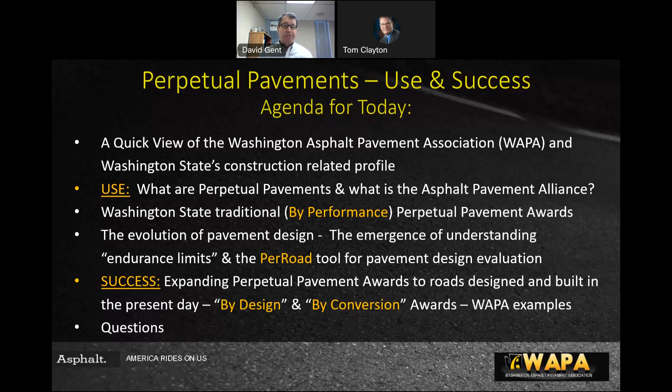Okay, this is being a little clunky.

Major attributions for the content of this presentation go to Dr. Dave Timm from the National Center for Asphalt Technology, which I'll refer to as NCAT, at Auburn University, where he's also a civil engineering professor. And Amy Miller, our national director for the Asphalt Pavement Alliance, and vice president of industry alliances for the National Asphalt Pavement Association, which I'll refer to as NAPA.

The Washington Asphalt Pavement Association is a single point representative. We were founded in 1954, before NAPA was even organized. All of WAPA's producing members are also NAPA members, so we are really invested in fully supporting state, regional, and national advocacy.

Washington Asphalt Pavement Association represents 15 companies and approximately 66 asphalt plants that manufacture 98% of the asphalt mix produced in the state. Those same companies are also contractors, constructing 98% of the public works pavements in the state for states, ports, etc. So WAPA is the single point representative for the asphalt pavement industry.

We work extensively with our Department of Transportation and all other stakeholders on asphalt issues, especially with local agencies and public works. We also work closely with the American Public Works Association chapter in our state to maintain local agency specifications that may differ from state DOT specs. Much like CAPA, we lead annual training programs and serve as the industry liaison for legislation and agency regulation.

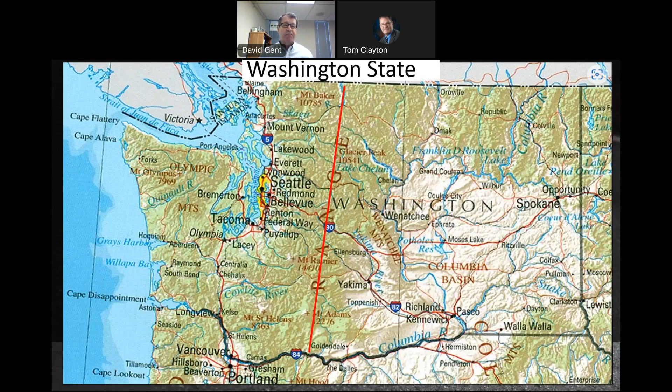Our state population is 7.71 million. Western Washington is more urban, with over 6 million people, or 78-plus percent of the population. There's a lot of rural character just outside the population centers, dominated by industry, seaports, and tech that underpin and drive the economy—Boeing, PACCAR, the ports of Seattle and Tacoma, Microsoft, Amazon, Starbucks, and older line industries like Weyerhaeuser are still centered in Western Washington.

We've got more moderate seasonal changes and much more rain on the west side, roughly an 8-month paving season from mid-March to mid-November, but we lose a lot of days to rain during that time. The dominant asphalt binder on the west side of the state is PG58H, an MSCR designation, which is basically PG 64 minus 22.

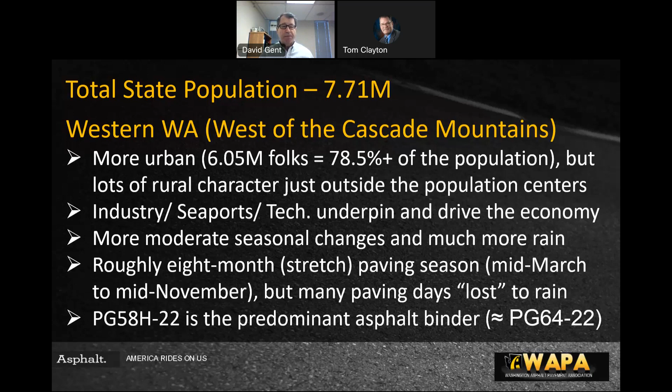On the eastern side of the state, it's more rural with an agricultural base—apples, potatoes, wine, and wheat. It's very arid with hotter, drier summers, and in the last 5 or 6 years that's meant wildfires choking the whole state sometimes for weeks on end. They have much colder winters, much more snow, and about a 7-month paving season.

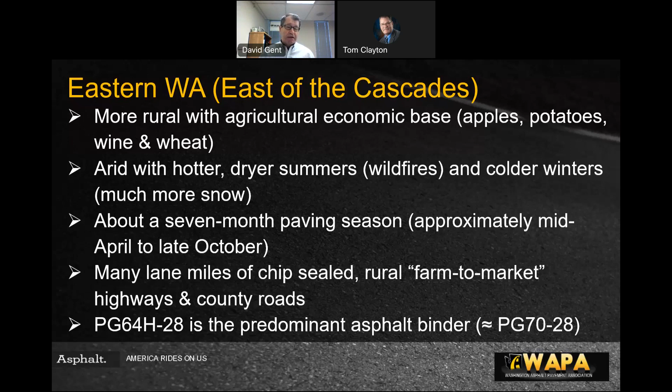Many miles of chip sealed pavement because they've got a lot of rural farm to market highways and county roads. They use PG 64H minus 28, which is roughly equivalent to PG 70 minus 28. So that kind of gets you this road miles.

This is a good reason for us to tell the story about perpetual pavement, to show that with proper preservation, they will serve the state well through many decades and generations. We want to spread that message and highlight it for legislative bodies that don't like to spend limited resources on boring stuff like pavement maintenance.

So what is the Asphalt Pavement Alliance? That's what we've got to start with, before we talk about perpetual pavement awards.

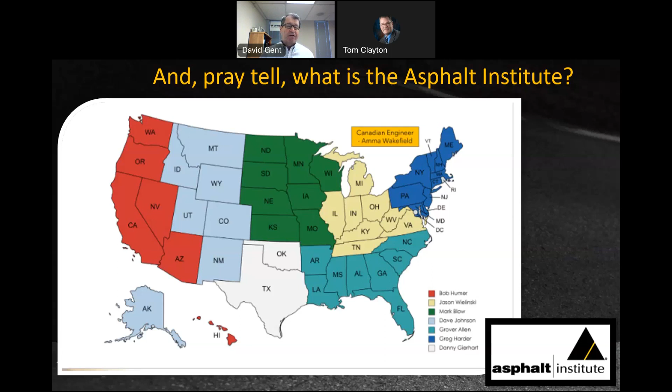She's something else, she's got a lot of ground to cover. They supplement the SAPAs and NAPA where needed, especially in critical states that don't even have a SAPA. There are several states, you can see in the West, several states that don't have state asphalt pavement associations, and a few in the Northeast too, and Alaska.

So perpetual pavements. Through the Asphalt Pavement Alliance, the industry came together in 2000 to identify long-serving pavements to highlight the long-term value of asphalt pavements that were designed and built appropriately. Remember, back in 2001, Superpave mix designs were very new and not widely accepted yet, and the predominant pavement design tool was AASHTO 93, done with nomographs, etc. The asphalt binders were non-polymer binders, usually best fitted to states' individual needs and best informed by the Asphalt Institute's old penetration or aged residue grading systems.

We've traveled a long way in the past 20 years, but prior to that, there were a lot of great pavements built that deserve recognition for their superior performance - that's the APA's mandate. Secondarily, but it actually became a very key role, they could help industry examine what the best of these long-term pavements had in common. Why did they last so long?

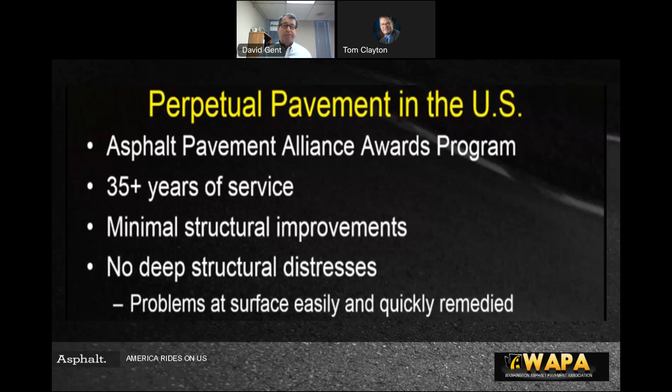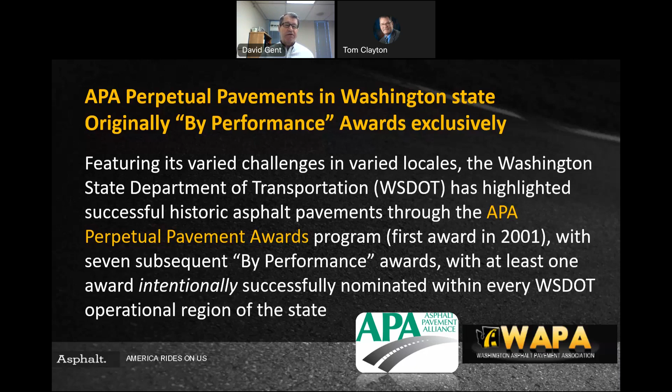The APA Perpetual Pavements in Washington State were all originally by-performance awards exclusively, which is true for every place in the country up until last year, featuring our varied challenges in varied locales. The Washington State Department of Transportation has highlighted successful historic asphalt pavements through the APA Perpetual Pavement Program, with 7 subsequent by-performance awards, with at least one award intentionally, successfully nominated within every operational region in the state.

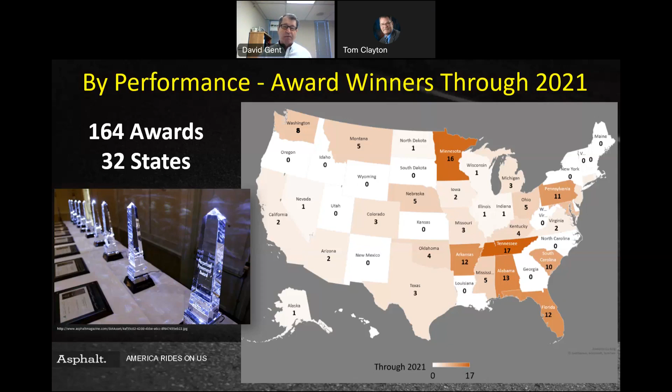So what is a by-performance perpetual pavement? Minimum of 35 years of service life, so it's proven by performance. Minimal structural improvements over the pavement service life, not more than 4 additional inches of structure in the last 35 years. Resurfacing infrequently, not less than 13 years before overlays, and no deep structural distress. Only surface remedies needed to maintain the full functionality of the pavement.

These criteria were used by the APA to determine award winners for legacy pavements that have proven that the structural design was designed and built to meet its intended function. They need to have been in service for 35 years.

So Washington's, I'll just highlight our 2021 by-performance award-winning pavement, mostly because it doesn't have to be a high-profile pavement to be a perpetual pavement. This is a 4-mile plus section of State Route 7. It has an average daily traffic of only 1,971 with 9% trucks.

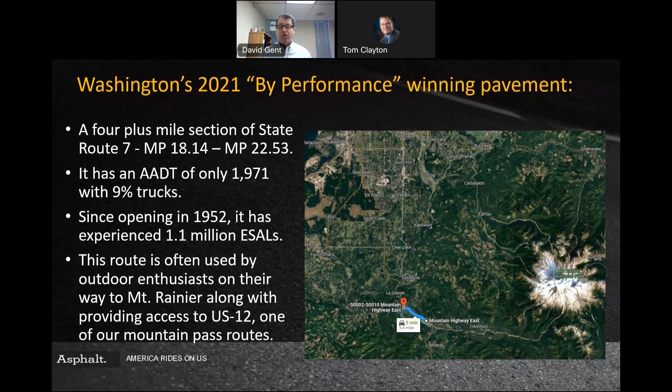This example is the definition of a perpetual pavement by performance. It's proven its design over 70 years of service. Just real quick, the pavement structure consists of 3 inches of asphalt concrete, Class B - an old spec for 5/8 dense graded mix - with AR 4000W asphalt binder originally, over 2 to 5 inches of crushed surfacing, over selected untreated granular material.

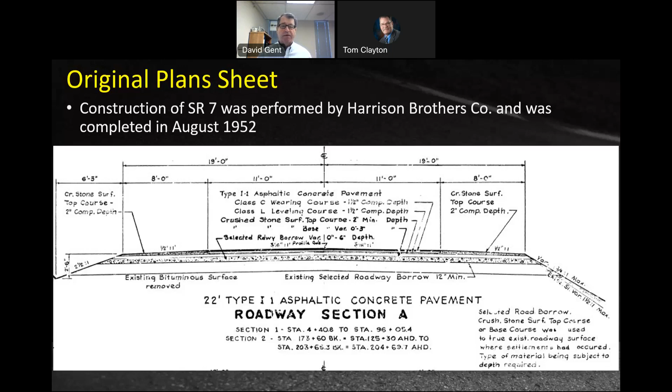So they basically reshaped the road from its original design over some gravel borrow and built this 3-inch pavement over the top of it. This is just a more close-up picture of the design of the time. In this region of our state, we're very fortunate that we have hard, clean gravels, so the salvage material used on the bottom from the select borrow through the crushed rock layers incorporated into the pavement are all superior quality rock with respect to highway construction.

On this particular highway, traffic loads have remained modest, and with recent 20 years of restrictions on timber harvesting, it may even have declined a little bit on equivalent axle loads because there are fewer logging trucks in the area than there had been 20-25 years ago.

So the last major rehab on SR7 occurred in 2005. It consisted of a 0.15-foot overlay, 1.8 inches. The Class B 4000 AR 4000W was an outdated design. WSDOT currently uses a 1/2 inch or 3/8 inch HMA hot mix asphalt with PG binders that I talked about earlier. In this case, back then we were still using the newer PG grading of 58-22 at that time.

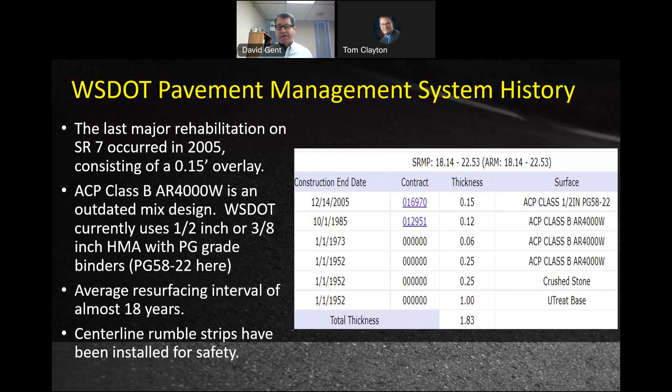That's a picture of our by performance winner for this year. These photos show that it's just an average rural highway that's performed its job well for 70 years with nothing but timely surface rejuvenation via thin lift overlays. So I think it looks pretty good for a 70-year-old whose last facelift was 17 years ago.

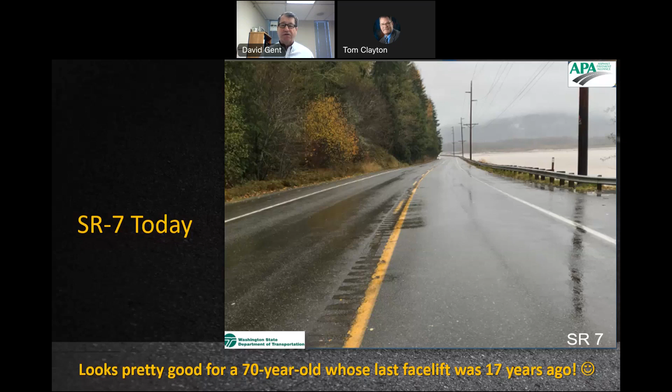This road hasn't been touched except to mill in a shoulder and centerline rumble strip since 2005. The surface still looks in pretty good shape, likely another 5 years until another mill and fill is performed. We may well be witnessing the advantages and improvements and extended maintenance windows that are going to be garnered by using modern PG binders and Superpave mixes, because we've got 17 years and another 5 years, I think, before it's needed again.

This road is 70 years old and it has been worked on by 4 separate contracts and 3 separate contractors over the years. It's nigh impossible to recognize the combination of contractors that built the highway and maintained it. This is a small disappointment in the award's value, as it recognizes work that's really the work of long retired folks. So another reason that we're going to go forward with Perpetual Pavement awards that are going to expand.

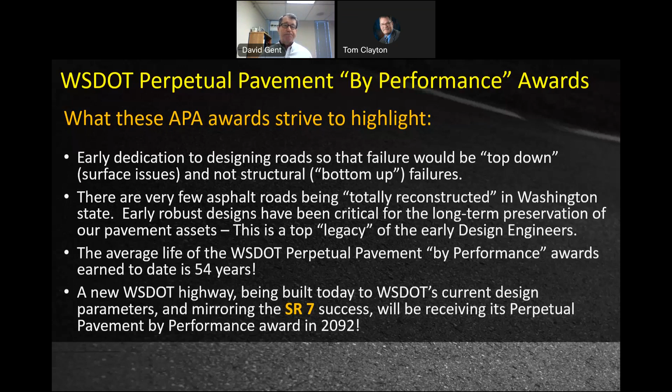Highway contractors work with the DOT every day to efficiently fulfill this legacy, and I'm sure that's true in Colorado too. I'll highlight a few more of these, it'll become apparent why, but there's another 3 award winners built in 1970.

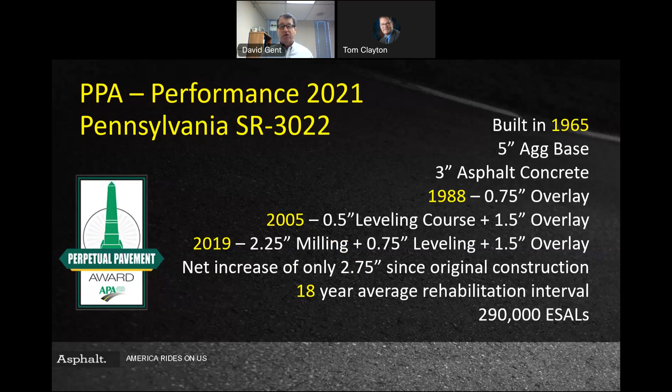In Pennsylvania, they do it a little differently, but come up with the same history. A highway built in 1965 with very low ESALs, unlike Alabama which had high ESALs. This is a very low ESAL highway in Pennsylvania, with over 18 years between rehabilitation intervals. Again, 56 years old, a fairly modest highway, but it's a perpetual pavement and it's still performing after all these years.

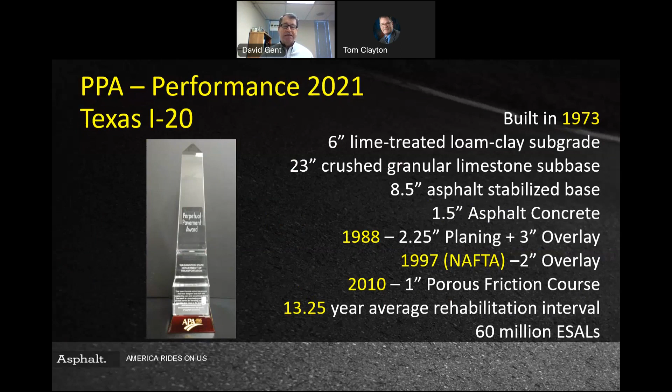Here's one in Texas. The difference here is they've got a lime-treated loam clay subgrade, so they enhanced the subgrade when they built it originally: 23 inches of crushed limestone, 8.5 inches of stabilized asphalt base, which is asphalt treated base, and then just a wearing course of 1.5 inches originally. You can see how it's been upgraded over the years. One of the upgrades was done really just because of additional traffic load from the NAFTA agreement in the late '90s. That's a 60 million ESAL road.

So that's the use of the Perpetual Pavement Awards, recognizing roads that are holding up well over many decades. Now, part of the success is we want to actively recognize and promote perpetual pavements that are being designed and built in the recent time frame, so that we can honor the people who are actually designing and building them now, rather than just historic models.

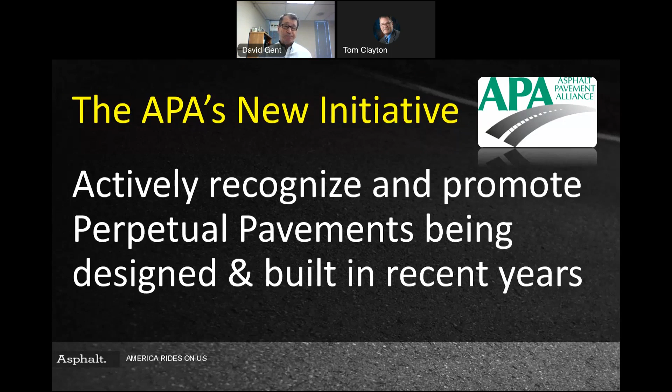So how do we do that? The concept of by-design and by-conversion awards. These new awards are at the confluence of modern pavement design and limited strain calculations that, when evaluated, allow for the expansion of the Perpetual Pavement Award Program to promote pavement constructed with the long view fully considered.

We've recognized old superior performing pavements, but what have we learned from these by-performance APA perpetual pavements? This is one of the reasons we're going from use to success. You'll see that this program has actually become integral in validating newer pavement analysis, and how can this information promote optimum structural pavement design today?

In the pre-1950s, basically we were mainly designing pavements based on experience. There wasn't a uniform design standard used in the U.S. Most of the conventional perpetual pavement awards that we're awarding today were designed in this era.

In the 1960s, AASHO at that time, the road test provided a national design standard. It was an empirical design standard based on conditions at the AASHO road test. Despite its limitations, it's been used by the majority of states ever since. The first edition was published in 1962, but it's been refined by experience and results over the years.

In the 1980s, we recognized a need to, or the possibility of moving into a more mechanistic design standard. We'll talk about that a little bit going forward, mechanistic empirical design standards. The concepts were well developed in the 1980s, but the computational power needed to do it efficiently was lacking.

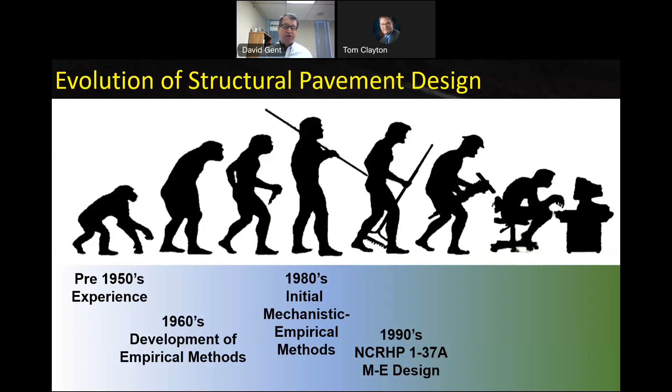In the 2000s, many states worked on implementing this MEPDG, but over half of the states still use the AASHTO empirical system. It's now AASHTO 9398, or our state uses a version called Darwin, but they're all the same design criteria.

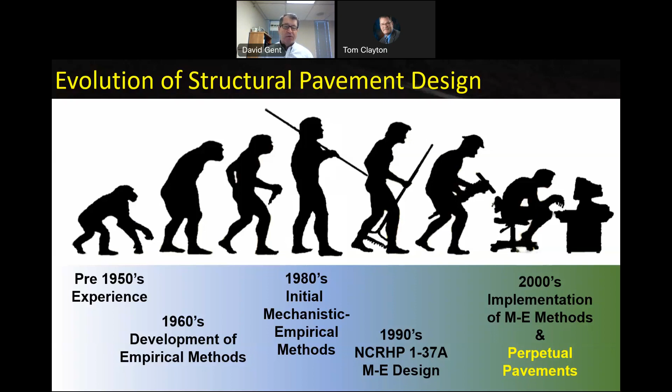The APA award program began in 2001, and about that time, it started to help pave the long road towards a design system that could intentionally evaluate the design parameters required to build perpetual pavements. That's the main focus of the success part of this presentation.

So structural design: you start with the subgrade. What's the support, the susceptibility to reduce strength due to moisture or expansion? Then you add the traffic on top of that, equivalent single axle loads. We bring in the variations of climate—moisture, freeze-thaw, hot and cold extremes—and then the materials that you use to actually build a pavement. What impact do they have? What structural attributes do they have when you're building the road?

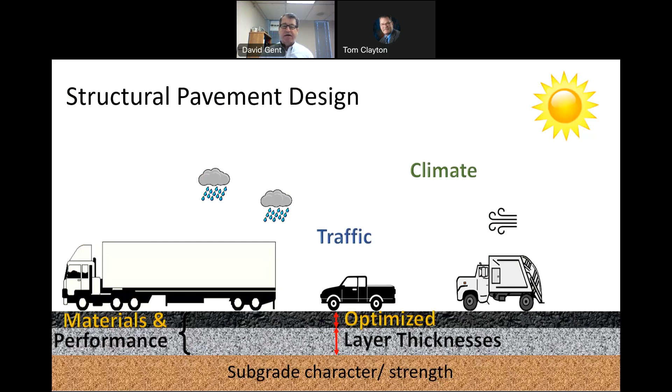What we're trying to do with the modern tools is optimize these layer thicknesses so that we're designing perpetual pavements, but not over-designing them. The goal, regardless of the design system used, is to arrive at an optimal set of layer thicknesses that meet the needs of the subgrade, traffic, climate, and performance expectations of materials being incorporated into the project.

There's many examples, because of this by-performance awards, we have many examples and documentation of what has worked—over 160 awards in 32 states. Many successes have been achieved through conservative designs, the older empirical-based design systems, or just experience-based design systems.

We needed a design system to analyze and get to optimum and economic pavement structures, compute maximum layer thicknesses for design consideration conditions, and consider what we do with existing pavements that need structural improvement or rehabilitation. The existing Perpetual Pavement Award winners were likely a combination of over-design and good construction, and they gave researchers good information to continue to refine design standards.

We need to continue with this good construction, but also optimize the road section using modern design approaches. We need a system that will tell us when the layer thicknesses are thick enough. AASHTO empirical and MEPDG do not directly have a mechanism to determine maximum effective thicknesses. So we need a system that can handle structural improvements to a road that's going to be rehabbed from an existing pavement.

So how can we use our evolution in pavement design to supplement and enhance current mechanistic and empirical design systems? Researchers ask the question, what makes a pavement structure perpetual? How can our well-understood design methods evolve and be enhanced beyond simple design life models? The answer is limited strain endurance limit models.

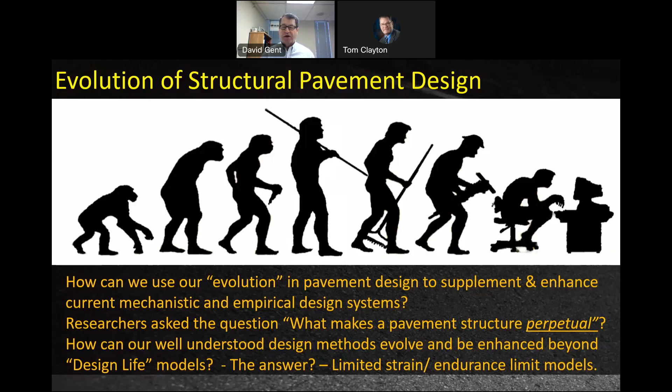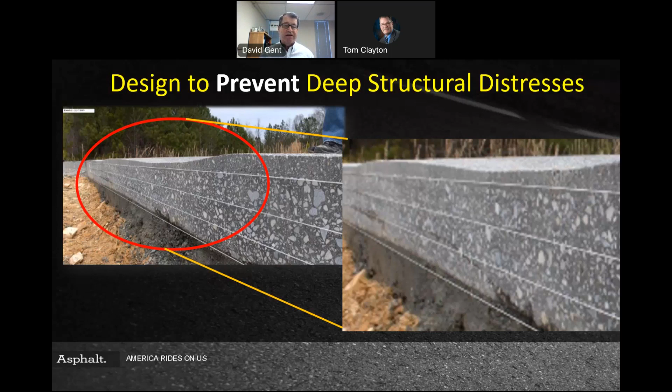Perpetual pavements do not experience either of these failure modes. So a closer look at bottom-up fatigue cracking: this layer of asphalt, or layers of asphalt, in this case what is called four lifts, because of the flex that's happening at the bottom of that layer between that and the subgrade, starts to fatigue and crack from the bottom up, and that's a structural failure rather than a surface wear failure.

So stepping through what we do for mechanistic empirical design: ME provides modeling of the strains at the bottom of the pavement structure. So you choose a layer thickness, H, and select corresponding material properties in terms of layer moduli, E. Then you use a mechanistic model to simulate a load event.

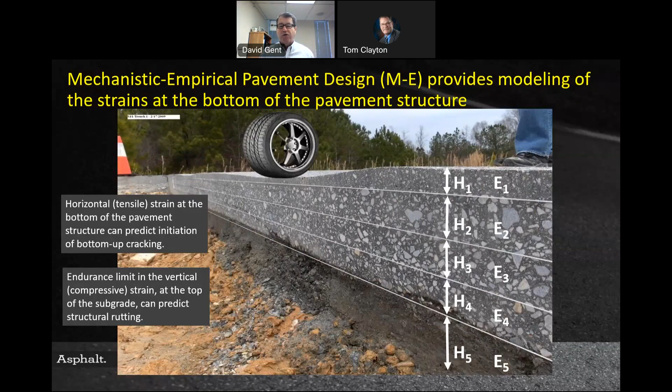A single tire is shown here, but any load configuration can be modeled. Then the mechanistic model computes tensile strain at the bottom of the AC, this horizontal strain at the bottom of the AC, to empirically predict initiation and growth of a bottom-up crack. Step 4 of the mechanistic model also computes the vertical compressive strain at the top of the subgrade to empirically predict structural rutting.

The M part of the ME design is the mechanistic computation of the strain. The E part is the empirical prediction. The newest pavement design methods contained within the AASHTO MEPDG manual help us calculate these now with the computing power we have available.

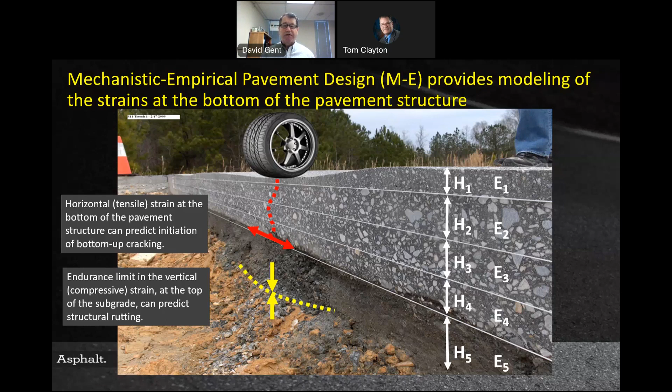After the process makes its performance predictions, how can the designer then adjust thicknesses and evaluate if the proposed structure may be over or under designed? What tools can we use to optimize pavement design? So perpetual pavement evaluation per PerRoad kind of filled this breach.

Perpetual pavement design can be thought of as a subset of ME design. Again, we still define the thicknesses and the layer properties at the start of the process. We also define loadings in the same way. We use a mechanistic model to compute the strain levels at the bottom of the structure, then use the PerRoad tool as an enhanced layer analysis of the design.

The difference is that rather than predict the development of cracking, we recognize that the material has an endurance limit, and that if we keep the strain, the horizontal strain and the vertical strain, below those endurance limits, we prevent the strain from propagating bottom-up cracks and structural rutting.

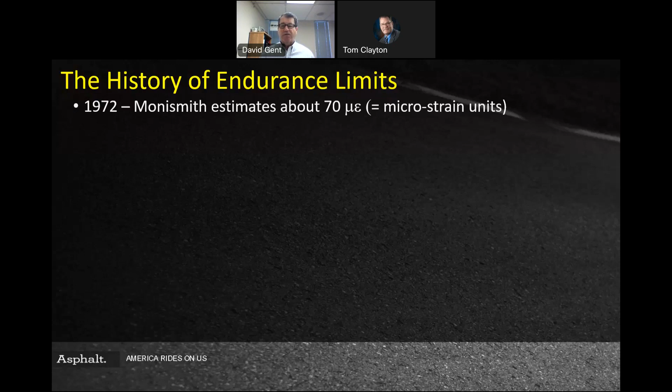Okay, the history of endurance limits. In 1972, Professor Carl Monismith theorized that asphalt materials had an endurance limit, and he estimated conservatively that it was about 70 microstrains. Jump forward to 2001, when he and some colleagues were involved in I-710 reconstruction in California.

They used the 70 microstrain standard as part of their perpetual pavement design. Using that value resulted in 13 inches of asphalt pavement being placed over rubblized concrete in a heavily trafficked corridor near the port of Los Angeles. This is a classic example of perpetual pavement by conversion, which we'll talk about more.

In 2002, the APA recommended using conservative values, since no new design criteria had yet been developed, and it was believed to be conservative at 70 microstrains.

In 2007, the NCHRP report, the National Cooperative Highway Research Program report 9-38 study, concluded that mixes with unmodified binders could use 100 microstrains rather than the 70 conservative value we'd seen in the past. And if you use polymerized asphalt for the horizontal strain, you could move that up to 250 microstrains.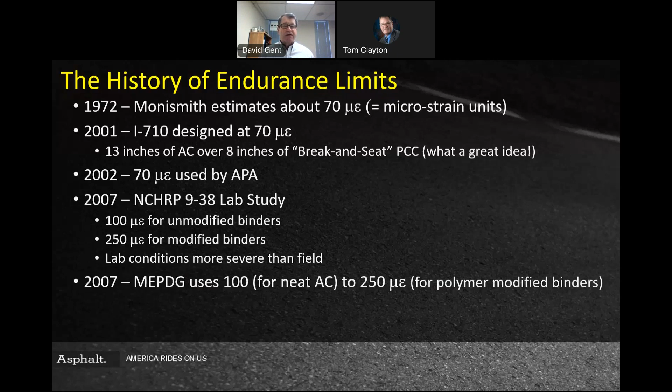That same study also discussed that field conditions would be less severe than the lab, and therefore even these were probably likely conservative numbers. In 2007, MEPDG software added a placeholder for perpetual designs and recommended using these same microstrain limits.

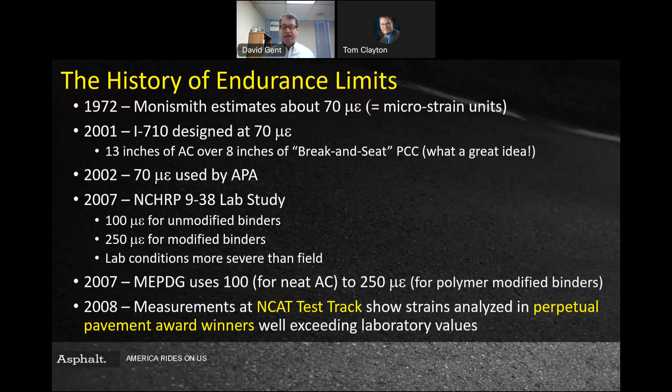And finally, in 2008, a study of full-scale sections of the NCAT test track demonstrated that measured strain could, at those levels, far exceed the lab values and still be perpetual. This will be discussed in the next few slides.

So NCAT plotted its test track information, and what do we got? Every section that they plotted—I won't go into this very much because it'll take a lot of time—but anything that plotted to the left of this non-fatigue slope did not have bottom-up cracking failure. And the gap between the two sections here is basically the 95th percentile factor used for safety between the two groups.

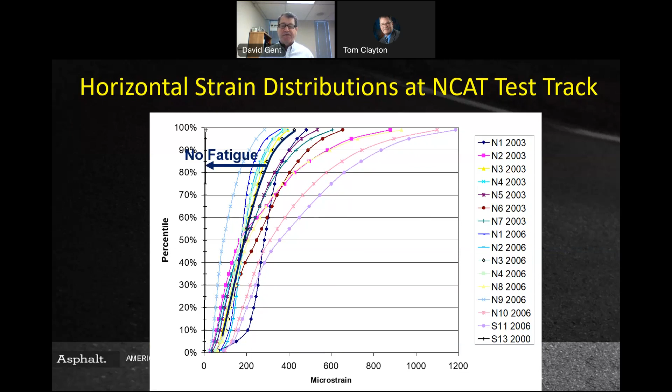When we design perpetual pavements, we have good data, and anything to the right did fatigue and had fatigue cracking. So we're starting to understand that the strain limits are about what we thought they might be, in the 200 to 250 range. You may also notice that one section is nearly aligned with the vertical axis.

This section here, to the far left, is a section of the original test track that had 24 inches of asphalt over very similar foundation layers as the thinner 9-inch section that's shown here. So it had similar performance. All these pavements to the left of the fatigue line endurance limit are perpetual. So it illustrates that in the case of the 24-inch section, it was highly over-designed. This is what we're trying to reasonably evaluate in perpetual pavement.

So NCAT had all this information from its test sections, but it also had all these years of actual perpetual pavements that it could draw on, all the information from the APA perpetual pavement awards.

So this plot, like the earlier plot, has cumulative percentile versus strain levels. You can ignore the dashed line—these dashed lines are failures of non-perpetual pavements. So these are all perpetual pavements from Iowa, Montana, Oklahoma, a second one in Oklahoma, Kentucky, Virginia, etc. This illustrates that the value of the information gleaned not from the test track, but from the APA proven by performance pavement population, is very critical.

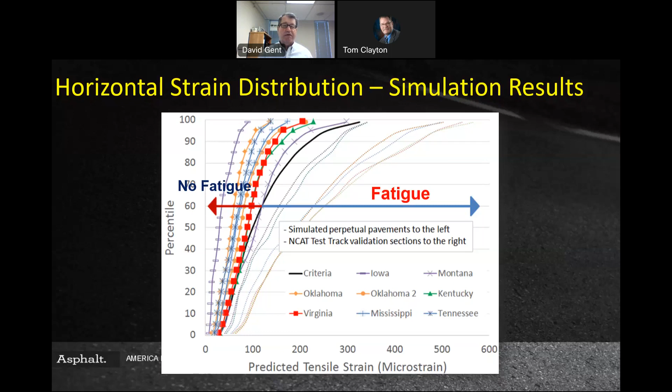NCAT plotted its test track predicted tensile strain and then compared that test track prediction against the actual perpetual pavements. So these certified perpetual pavements are in this no-fatigue zone. The most conservative curve, not surprisingly, comes from the thickest section, this Iowa section, the purple section, which had about 21 inches of asphalt, whereas the Montana section had 7.5 inches, I believe. Every other section in between these two is all on the good side of the non-fatigue line, and they're all perpetual pavements. So it validated the test track criteria and helped us move forward the PerRoad design model.

Much less attention and research was focused on vertical strain criteria to control rutting. Here again, the Asphalt Pavement Alliance proven by performance perpetual pavement information was helpful.

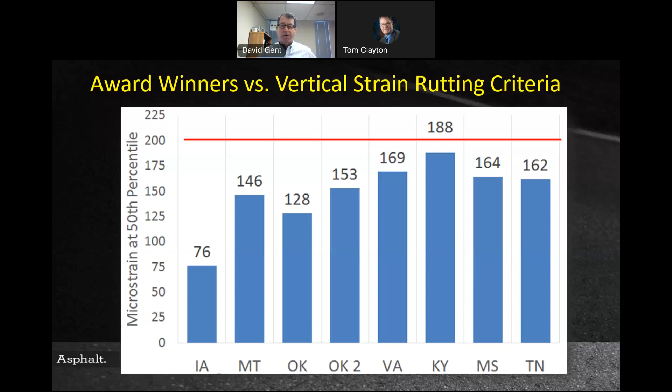In practice, when the properties of these pavements are evaluated using PerRoad, it also shows that some of these pavements were actually over-designed, like the Iowa example. PerRoad analysis can help get to an optimized design. So an idea is born.

Recognize new pavements - since we have this PerRoad endurance limit model, we can recognize new pavements designed to be perpetual. In 2015, our state pavement engineer, Jeff Uhlmeyer at the time, observed that when we were building our second major crack seat and overlay project just south of Seattle, the 50-year design life used for the pavement design resulted in a pavement that he believed would prove to be perpetual when tested against the microstrain design criteria validated by NCAT that we just talked about.

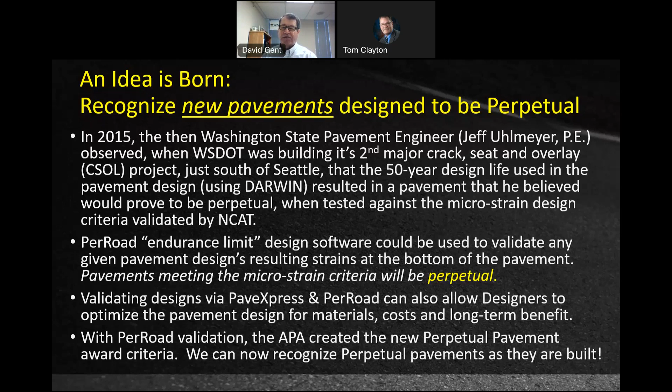With PerRoad validation, the APA created a new perpetual pavement award criteria. We can now recognize pavements that are built recently. Knowing that proven design techniques were being used by WashDOT, and with the advent of microstrain endurance limit analysis, the ease of using PerRoad allowed pavements to be validated by a real analysis of the endurance limits. With all the tools now in place, the Asphalt Pavement Alliance took on the challenge of recognizing pavements being built today to PerRoad criteria.

Given that PerRoad was added to the APA's AASHTO 93 based design tools in PaveXpress, the ability to meld and evaluate all the design criteria in either ME or empirical designs through PerRoad analysis was provided, and the opportunity to expand the APA promotion of perpetual pavements was instituted. In 2019, the APA - NAPA, SAPA, and Asphalt Institute representatives - began discussions on development of an expanded awards category so designers working today could be recognized for their efforts and vision.

So by-design and by-performance perpetual pavement awards were tested in 2020 using Washington State pavements that were recently built, one in 2011 and one in 2016. With successful criteria established, the awards were widely adopted in 2021. While the by-performance awards validate good experience-based design and good stewardship of the highway over the years, those awards could not be ascribed to today's WashDOT employees, nor could they really recognize the contractor who built the pavement, because they're very old pavements. Knowing that proven design techniques were being used by WashDOT, and with the advent of microstrain endurance limit analysis through PerRoad, we could now use that information to recognize pavements being built today to PerRoad criteria.

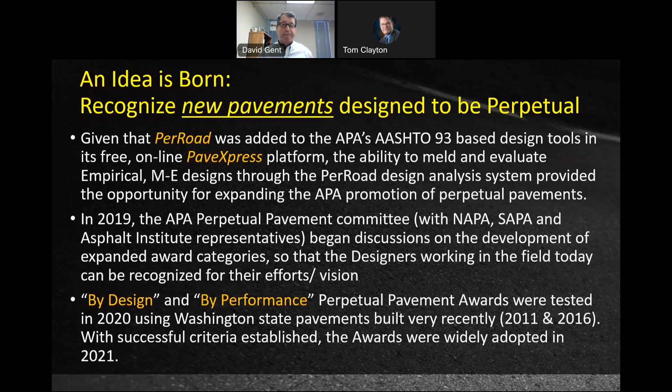So if you haven't ever been on PaveXpress, there are lots of training tools online. It's a free online web-based design catalog based on AASHTO 93/98, and it's been validated by several other state design engineers and design professionals. Again, it's free, with lots of training tools, and there are Pave instructors on it.

This platform helps us integrate the PerRoad criteria. Using the PaveXpress tools, pavement design variations can be tested in many combinations, so you can mix and match pavement thicknesses, etc.

The resulting design can then be validated using the PerRoad design parameters, which are embedded right in the same software. PaveXpress already has PerRoad design integrated, helping us approximate ME designs by using the old AASHTO designs and allowing for PerRoad analysis.

Note that PaveXpress has in-depth training videos. Pave Instruct PerRoad is section 6. Using the PaveXpress tools, pavement design variations can be tested in many combinations, and the resulting pavement can be means tested against PerRoad microstrain design limits.

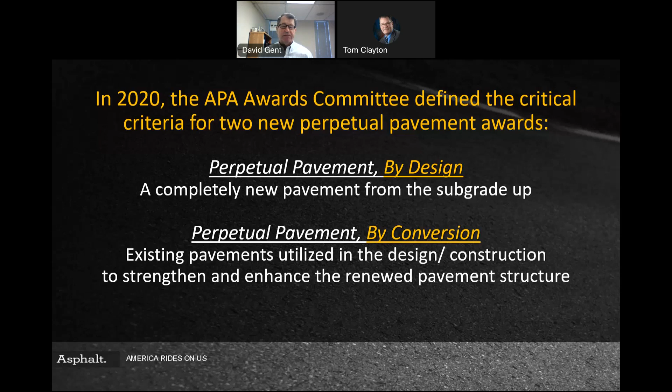So now there are three perpetual pavement award categories: by performance, the traditional one we talked about earlier; by design, which has been validated by NCAT, and the information gleaned has been put into PerRoad, or helped to validate PerRoad; and by conversion, which evaluates converting an existing pavement through rehab into a perpetual pavement. That's a by-conversion award.

In the new award nomination process, owners submit the pavement design section they used when building the road, along with the accompanying underlying design inputs. Those designs are then transferred to NCAT for independent evaluation using PerRoad, so it's not done by us, it's done by NCAT to make sure the road does meet perpetual design standards. If the design passes the PerRoad criteria, the limited strain criteria, it's judged to be a perpetual design.

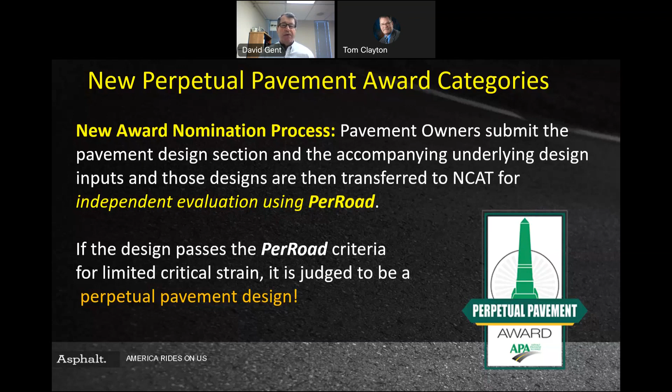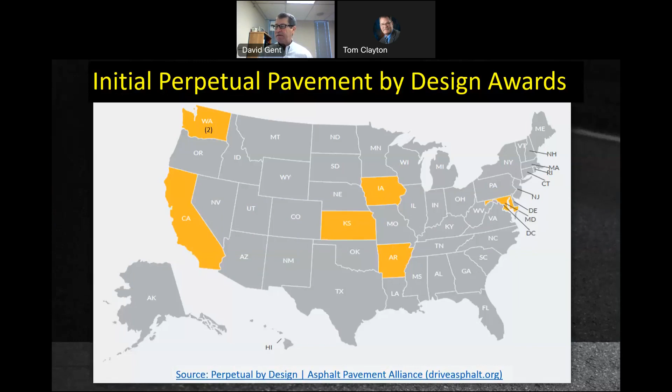Washington has two perpetual pavements by design: the first one, and then the one we got last year. Other states started picking up the award by nominating their projects. Just as we saw in the NCAT evaluation of the many by-performance perpetual pavement award winners from the past, these newly minted perpetual pavements by design again illustrate there are many ways to build a perpetual pavement from the ground up.

You can see a lot of different layer thicknesses, a lot of different subgrades, a lot of different interim materials being used, base materials, etc. All end up giving you limited strain at the bottom of the pavement design.

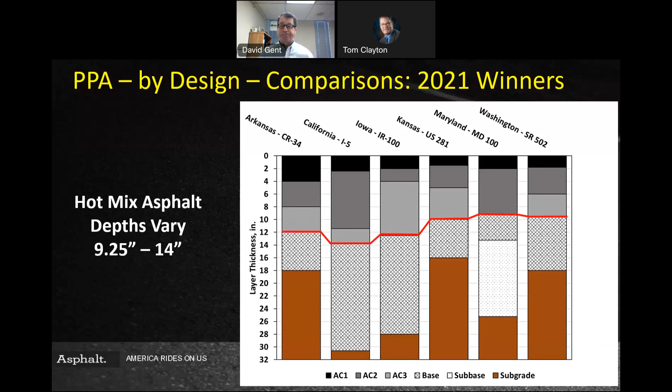As we talked about, the theory is that it's about between 8 and 14 inches. The ones that have won the initial design comparisons have asphalt that is 9.25 to 14 inches thick, about what was predicted by PerRoad.

So using the PaveXpress tools, pavement design variations can be tested in many combinations, and the resulting pavement can be means tested against PerRoad.

The award winner this last year was SR 502, about a 4.5 mile section of road in the southwest region of Washington State. The difference here is we get a fancy new obelisk, different from the original, and the contractor who actually built the job can be recognized and awarded, adding value to the new program for our membership at least.

We don't build a lot of brand new pavements in Washington State. I hesitated adding this cross section because of the lots of detail here, but it does illustrate that we're basically widening new pavements for the most part.

This is an extensive widening project, 1 lane and 10-foot shoulder in both directions. The new lane structure has geotextile for subgrade, gravel borrow, which is imported uncrushed gravel at the subgrade level, 8.4 inches of crushed base course, our 1.25 minus material, and 9.6 inches of asphalt in 4 different lifts using PG 64 minus 22 equivalent and 1/2 inch mix, including the final wearing course of 1.8 inches.

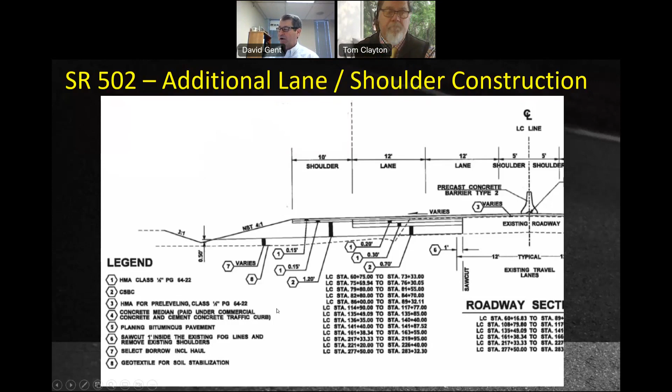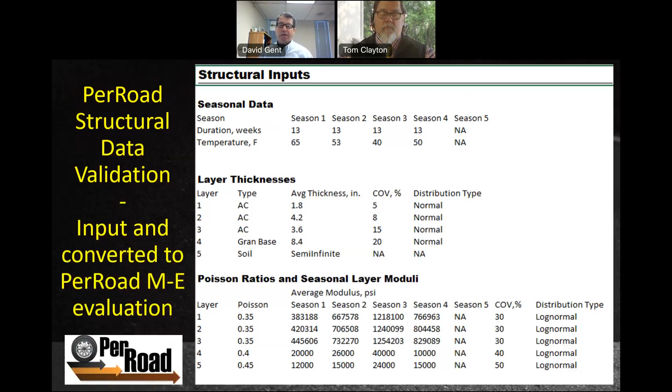So per road WashDOT, using the structural design they developed using Darwin, which is an advanced AASHTO 93 design software, enters its information into PerRoad. The Poisson ratios and seasonal layer moduli are all calculated from the information provided, blending mechanistic design with empirical design in the process. Known design data is entered into PerRoad in order for the tool to calculate the strain at the bottom of the pavement layer and the top of the subgrade.

So all the ADT is put in, axle loads, etc. All the stuff that you've actually already know because you've done your design in AASHTO 93. And these are the design criteria for a PerRoad by design and by conversion award winner.

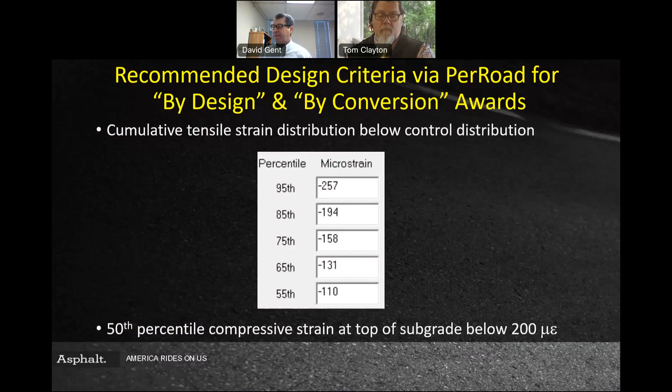The cumulative strains that we showed earlier, and the vertical strain, compressive strain for resisting structural rutting. So those are kind of the gatekeepers. And so all that's put into the PerRoad design by the National Center for Asphalt Technology. They run it through their software, which is again available at PaveXpress. And if you pass all those criteria, you've got a road that's going to be perpetual.

PerRoad validates the tensile strain at the bottom of the pavement to ensure that structure will be sufficient to resist bottom-up cracking in perpetuity. And similarly, the vertical compressive strain never exceeds 200 microstrains, which we talked about earlier. Therefore, the pavement will not experience structural rutting.

This analysis can be done by the nominee using the integrated tools in PaveXpress and PerRoad, but it's also, to get an award, it actually has to go through NCAT to validate it.

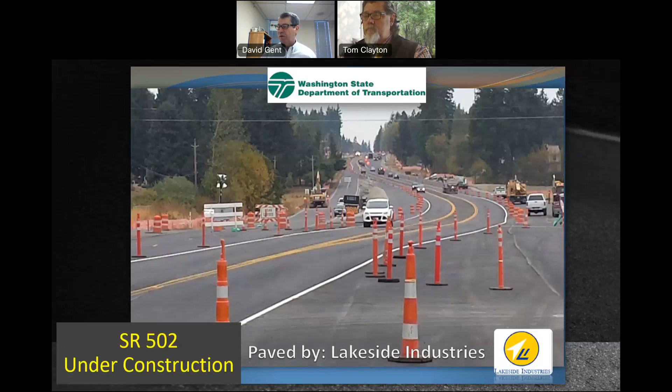We get to recognize both WashDOT and Lakeside, who built this. This is a 4.25 mile stretch of highway near Vancouver, Washington, constructed in 2017. Just a couple of pictures of it. Built this new lane and this new shoulder and then overlaid the whole roadway.

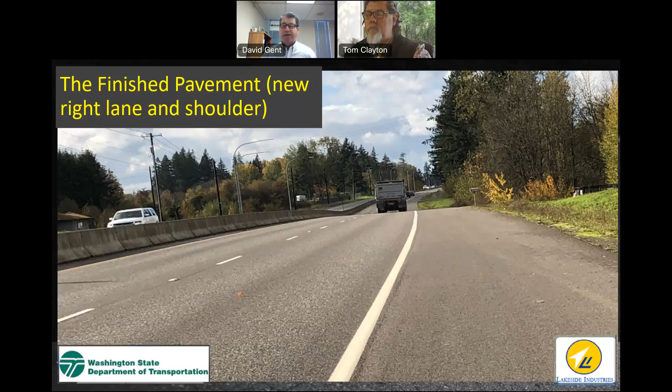But because of the design that was used, it's a newly built or nearly newly built project that should be perpetual, or is perpetual. It's not a particularly unique road section, other than the new construction is kind of rare in Washington State. The point is that WashDOT design can be fully evaluated during design for an intrepid designer, and the optimum design can be evaluated. NCAT independently then validates the final design for an award to be won.

Same thing for a conversion now. We move to the other category, the second new category, by conversion, evaluating the transformation of an existing failing and obsolete road that is treated in place and built back better. Similar nomination form, new obelisk, fairly straightforward process.

For it to be a converted road, it has to still be in use but structurally deficient. So you're adding thickness to meet a new design criteria, or it could be distressed and failing. Perform rehab to deal with distress.

And what we have used is crack seat and overlay. Others use rubbleized, treated bases, etc. Reflective cracking is a major problem if not considered, especially over an old concrete pavement. So this is why crack seat and overlay and rubbleized pavements are pretty well defined nowadays. We test the design for the perpetual pavement criteria against PerRoad.

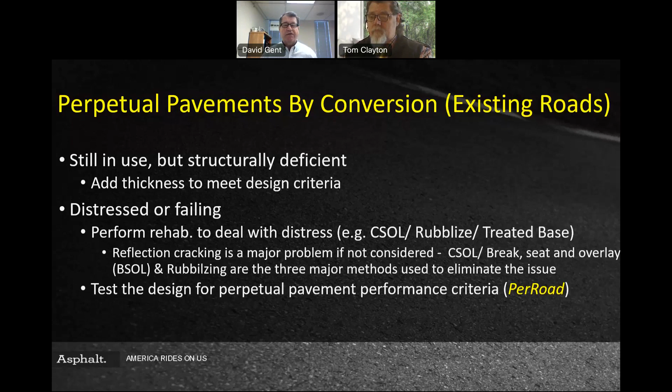The initial pavement by conversion awards, again, we have two. And so we were a little bit ahead of the game because we were the test bed. But then I see that Illinois got two, and I didn't know that was possible. But it actually is, they won both state pavement and a county pavement, both won an award. And I didn't know that was possible. I thought it was only one per year, but evidently it is.

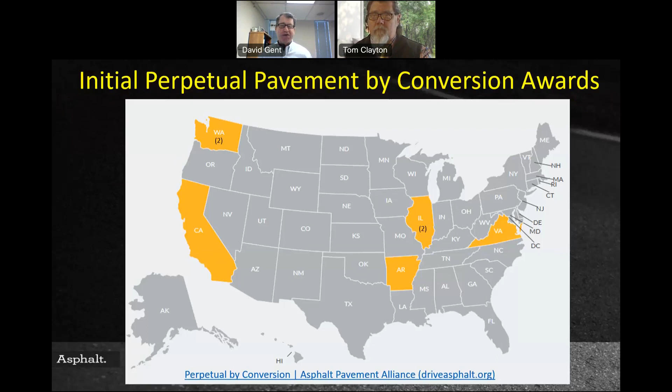So everybody can catch up. The by conversion perpetual pavements are bound to be even more diverse in how they were built, because for these awards, you need to start with the existing pavement and build a new structure using the existing materials as the base. Notice that Illinois Highway 4, for example, I'll talk about it a little bit later. It was originally only 4 inches of asphalt on subgrade, and it failed.

This is the Illinois 4. This 4 inches failed, and they put a 6-inch unbonded concrete overlay on the top of it, and that subsequently failed.

Mostly due to severe blowups, the solution was to rubbleize the concrete and pave it over with 5 inches of superpave hot mix asphalt in 2 lifts. Therefore it becomes a perpetual pavement by conversion if it meets the PerRoad design criteria, and it did in this case.

Again, this varies almost exactly as we predicted, between 8 inches and 12 inches of pavement to get to a place where the pavements are perpetual.

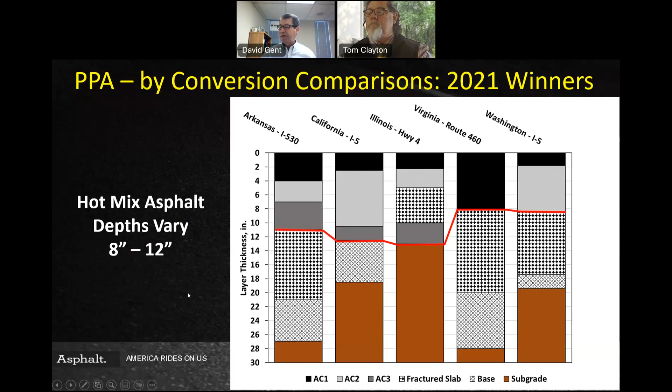Okay, so our perpetual pavement by conversion award winner was southbound I-5, my poster there. Our most heavily used interstate, Interstate 5, 200,000 ADT, originally constructed as concrete pavement in 1965.

Various rehab projects over the last 20 years of slab corner repairs, full panel replacements, dowel retrofitting, diamond grinding, surface smoothing were no longer effective, and ride roughness was skyrocketing. It continued ride deterioration due to uneven concrete slab support.

We used plain jointed concrete in the original construction, so there were no dowels originally. That's why we had dowel retrofits.

On this project, the worst 2.7 miles of I-5 southbound was resurfaced in 2015 via crack, seat, and overlay process. The resulting composite pavement meets PerRoad perpetual pavement design criteria and therefore qualified for a by-conversion award. This project was the impetus of the by-conversion perpetual pavement award.

As I talked about earlier, the state pavement engineer, upon completion, said not only did this crack, seat, and overlay solution save in excess of 25% versus a concrete replacement in its life cycle cost analysis, it was also designed to be a perpetual pavement. And he said, we should get an award for that. The Asphalt Pavement Alliance eventually agreed.

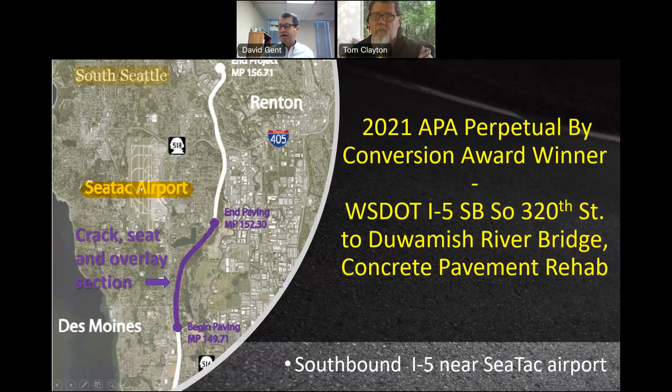Real quick, this is just south of Seattle proper, just east of SeaTac Airport, southbound I-5. Just prior to beginning the process, the IRI was routinely in excess of 175 on this inside lane, with dangerous patched sections.

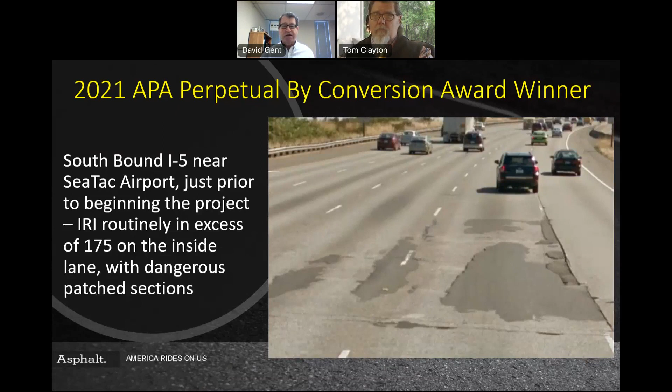And the design that the state came up with was to crack and seat the existing concrete, and then put in 8.4 inches of mix, eventually 4 different lifts, 2.1 inches each, over the entire roadway.

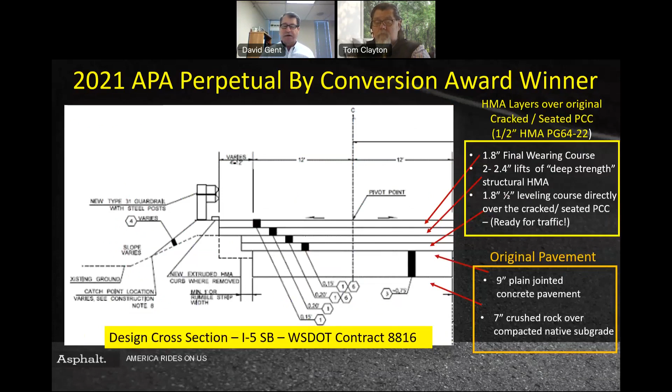Here's the project detail, the cross section with the various lifts. What we did was crack and seat the pavement and then put these lifts in on successive weekends. It was very successful in closing the project down and having the whole thing completely redone in 4 weekends, though because of rain, they weren't successive.

So we'd close up to 3 lanes on Friday night and begin the process, cracking and seating. As those slabs are seated and lanes completely cracked and seated, we start the multi-lane paving right behind it. On Friday night it was rough as a cob concrete pavement, and by Monday morning the successive layers made it very smooth. It was like magic. If you don't know about crack and seating, this is what we do.

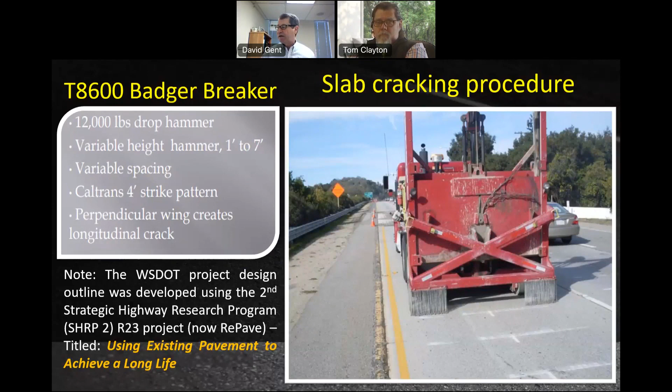The WSDOT design outline was developed using the Strategic Highway Research Program's R23 project, using existing pavements to achieve long life. You basically use a big guillotine hammer to crack the existing pavement, and you can see the resulting cracking pattern here, showing why there's lots of distress that can't really be fixed in any good way anymore.

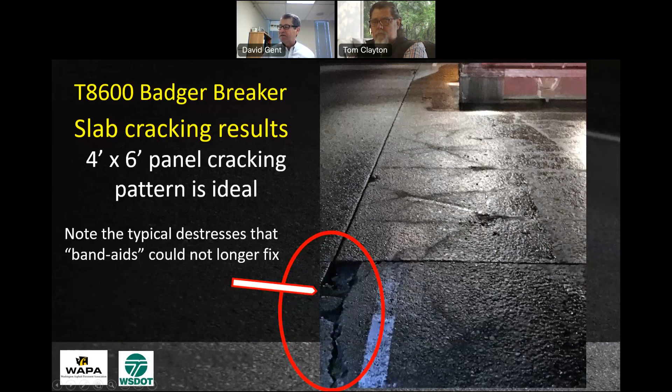The Band-Aids weren't working anymore, so we crack these into 4x6 panels. Then we test to make sure it's cracking all the way through, so that we're getting some relief cracking while also retaining a lot of the structural value of that old concrete.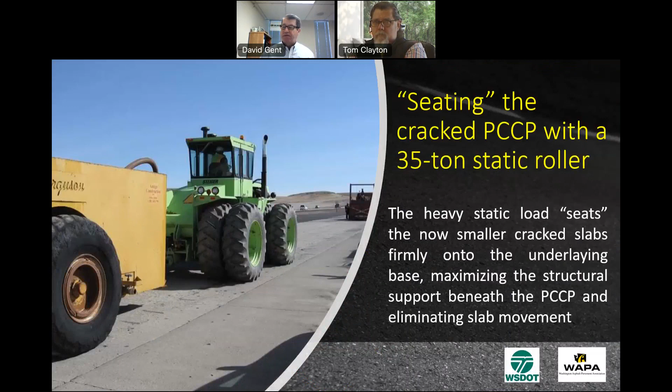This is done earlier in the design sequence. Then we seat the cracked concrete with a 35-ton static roller to seat it into the subgrade below, so then you've got a very good base to pave over the top of. You can see the drop hammer scoring here in this picture, and we're starting to pave.

State-of-the-art paving with state-of-the-art Superpave materials. With the cracked and seated surface cleaned and tacked, the initial layer of leveling asphalt is installed, followed by 3 successive lifts to get to 8.4 inches, as I talked about before.

The finished pavement had an average 49 IRI score, which is very smooth, with average compaction on the wearing course exceeding 94%. It's a very smooth ride, perpetual pavement.

Because we were able to close the freeway over 4 successive weekends, this contractor had a peak production of 650 tons an hour. He put down over 60,000 tons of mix over 4 weekends.

In order to create the best possible final product and minimize disruption, all 5 lanes of wearing course were paved over. The last wearing course was paved over a single weekend, which is what can be done with asphalt, quick paving.

There's the final project, still performing very well today. Just another view of it.

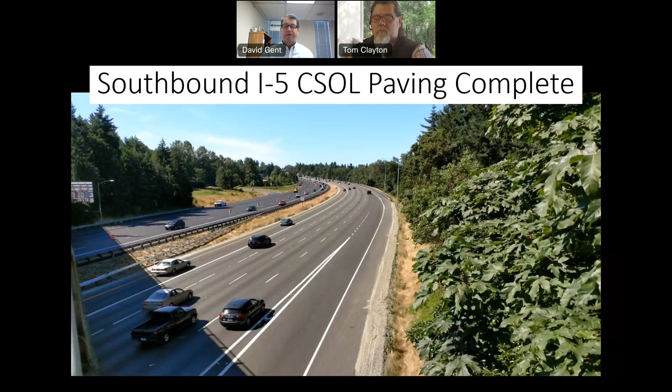And here we go again, the Secretary of Transportation, the Office Pavement Engineer, the Northwest Regional Engineer, and their folks are there, and the contractor can be recognized too, Icon Materials in this case.

The converted pavement is performing well 6 years later. The WSDOT crack seat and overlay process, as refined in this project, was used on a larger sister project on the northbound lanes the next year, which had 100,000 tons on it.

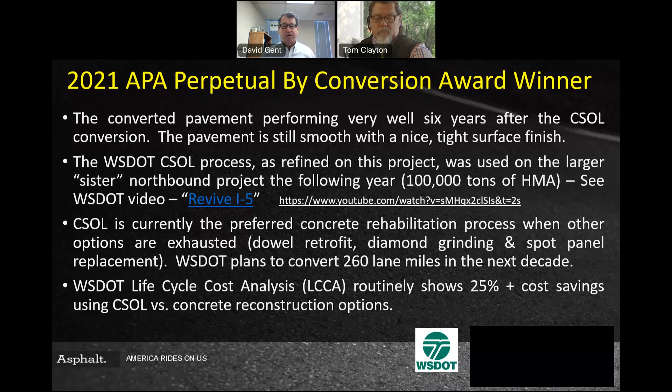The crack seat and overlay is currently the preferred concrete rehab process when other options are exhausted. WSDOT plans to convert 260 lane miles in just the next decade. WSDOT's life cycle cost analysis routinely shows a 25% savings, and they're perpetual pavements.

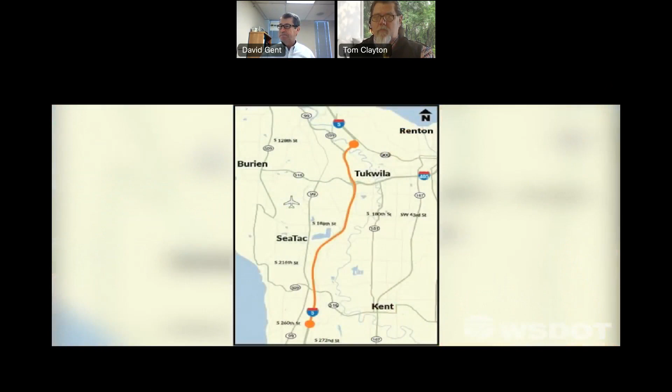In summer 2017, we are repaving 4 miles of northbound I-5 between SR 516 in SeaTac and South 170th Street in Tukwila.

It's all part of our larger effort to revive I-5. The interstate's concrete surface is more than 50 years old. Some of the parts are starting to wear out. We've got broken concrete panels and others that are moving because the soil underneath has given out.

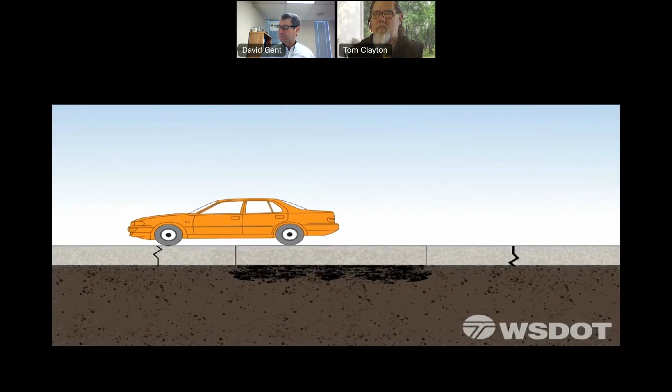They only move fractions of an inch, but if we just put asphalt over the concrete panels that are moving, the new asphalt would quickly crack. To avoid this, we're using a process called crack, seat, and overlay. This allows us to condense a couple of years of individual panel replacement work into a few long weekends.

Here's how it works. A panel breaking machine cracks the concrete. The one our contractor is using has a 12,000-pound blade. Every 3 or 4 feet, it drops like a guillotine onto the concrete panel, cracking it.

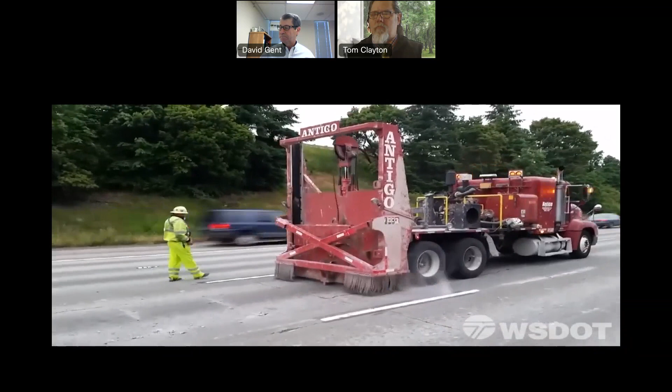Watch the rubble in the road bounce every time the blade hits. Even 20 or 30 feet behind the truck, you really feel the ground jump, and it's loud, even wearing ear protection. Next, a compactor presses down the broken concrete.

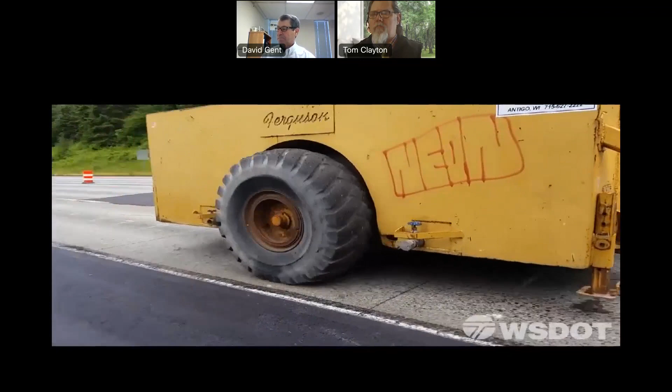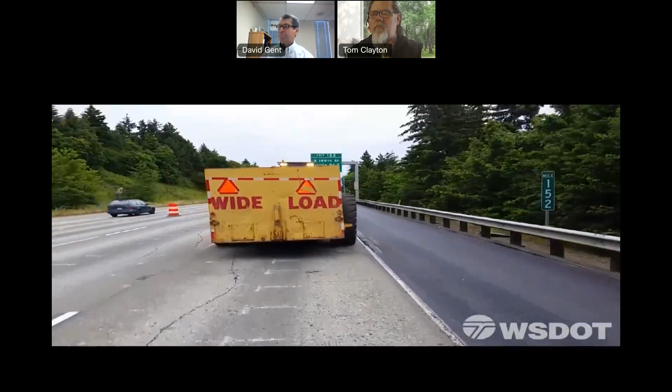This is basically a giant block of steel that weighs 70,000 pounds with huge rubber wheels that make sure the concrete is firmly seated into the ground so it will be a stable base for the new asphalt.

Once that's complete, the paver comes through and paves the first layer of asphalt. It moves very slowly, putting down a couple of inches at a time. It takes a lot. Just one truckload of asphalt will pave a section 1 lane wide and about 100 feet long. And that's just the first layer.

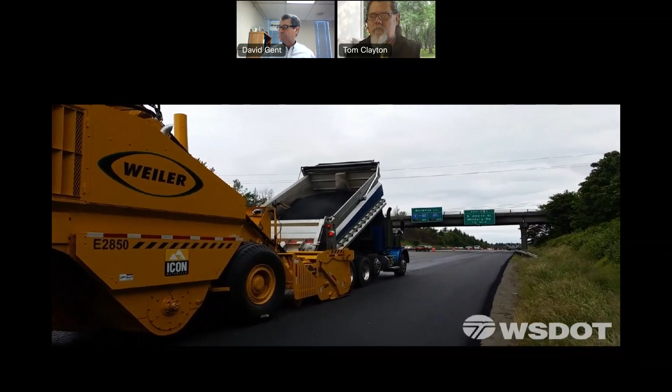Of course, I love Washington Perpetual Pavement Awards, but one of my favorite awards this year was the winner of a county road in central Illinois that I talked about a little earlier. Why was that? Because it highlighted a previously unheralded design that they have dubbed the Oreo design.

Piatt County converted a dangerous, deteriorating 5-mile section of Monticello Road, County Highway 4, from a 5-inch white topping to a multi-layer asphalt top roadway. This portion of the county road is expected to require only minimal upkeep in perpetuity, and the very dangerous concrete blowups have been completely eliminated.

You can see they use rubblization rather than crack and seat on this project. According to the Piatt County engineer, rubblizing the existing concrete road and using it as a base for the new asphalt pavement prevented the failing concrete white topping material from ending up in a landfill, which is key.

There are other financial benefits to consider with increasing costs both now and in the future. The county highway engineer says highway agencies should at least explore the concept of perpetual pavement in all future designs. The ability to limit the cost of pavement maintenance should be appealing to all highway owners. An article highlighting this project is also referenced in the FHWA study of perpetual pavements.

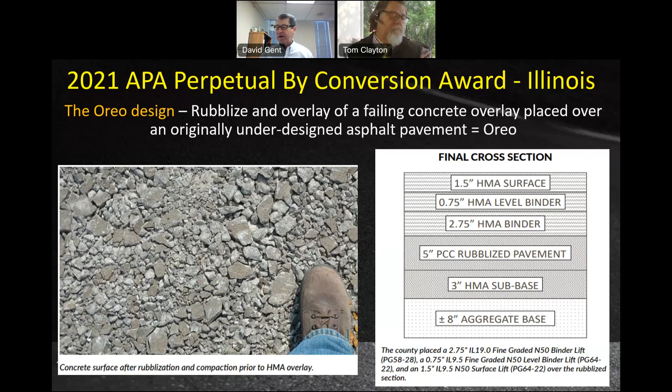This report cited perpetual pavement's contribution to reducing the depletion of ozone, fossil fuels, water, and global warming, smog, and ecotoxicity. A lot is accomplished by not having to tear pavement up, take it to a landfill, or reprocess it and rebuild the road from scratch.

In Washington State, the crack seat and overlay designs have been found to save in excess of 25% of life cycle costs over a 50-year design, compared to recycling in place.

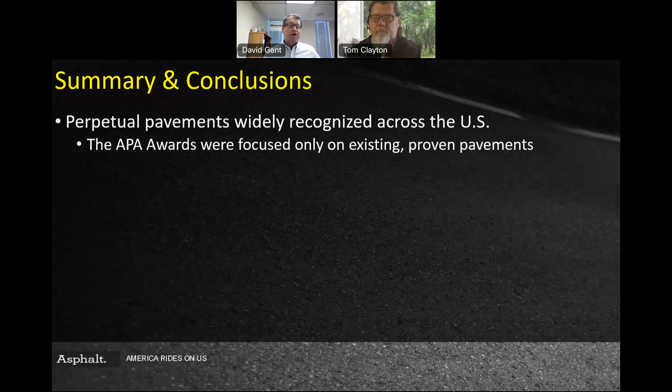Perpetual pavements are widely recognized across the U.S. The APA awards were focused only on existing, proven pavements. The new emphasis is on perpetual pavements by conversion and design. We must consider existing distresses, and the PerRoad endurance limits help with the design.

Perpetual pavements can be designed using mechanistic principles. PerRoad and PAVEXpress are effective, free, and widely available design tools that incorporate strain distribution design analysis. Perpetual pavements by design and conversion are proven to be very cost effective and can be optimized during design.

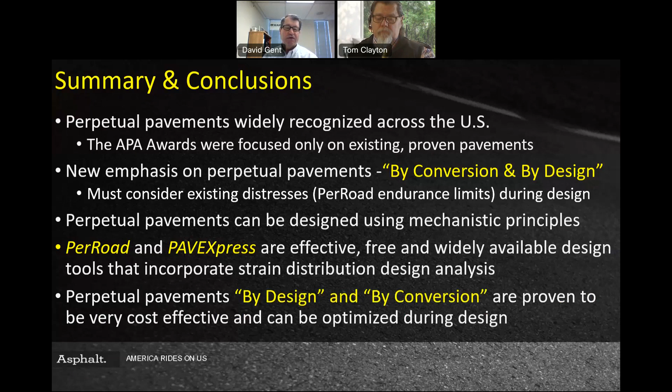And I think that is the end. If there are any questions, I guess now is the time. Tom or Mike, whoever's running the program, if you want to take back over, I will stop sharing my screen.